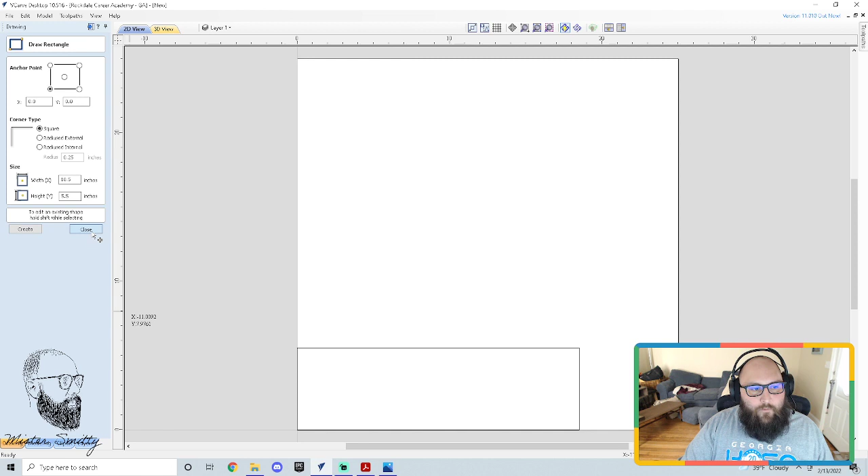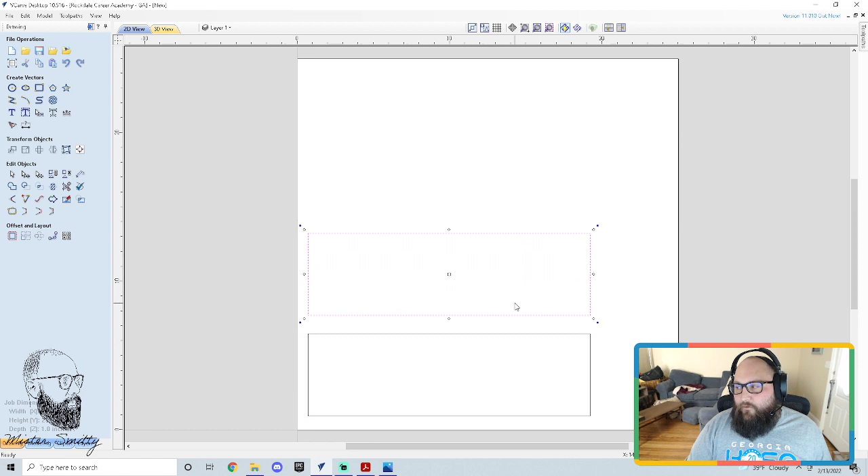So what I'm going to do now is I actually need 2 of these. One's going to be the board, and one's going to be a cover that goes on top. So I'm going to move this off the edge a little bit, using the arrow keys. Remember, if you click and highlight and it turns that pinkish purple color, you can use your arrow keys to move. Then I'm going to Control C and Control V to create a second one, and I'm using the arrows to move that one. So these are kind of my tops and bottoms.

One thing I have not shown y'all yet is you can use a measuring tool. Over here on the left, under Edit Objects, there is a measure tool. So if you forget your dimensions, you can use this tool to measure it. So you'll see that I measured that top piece, and up here the distance is 18.5 between those 2 points.

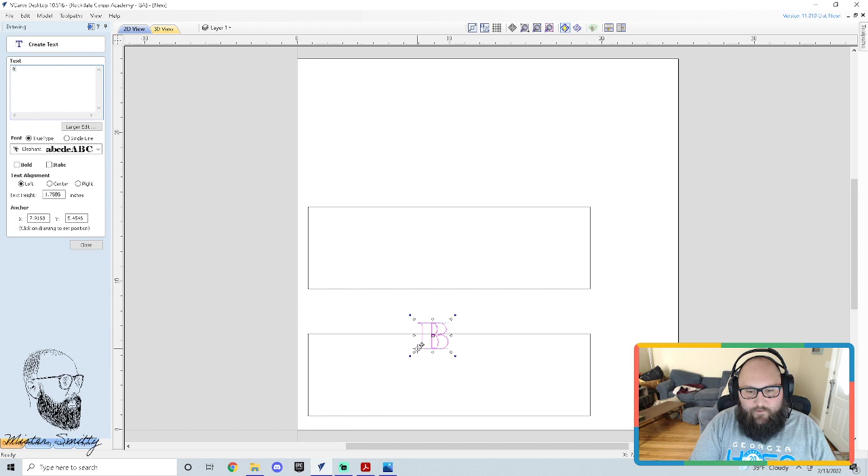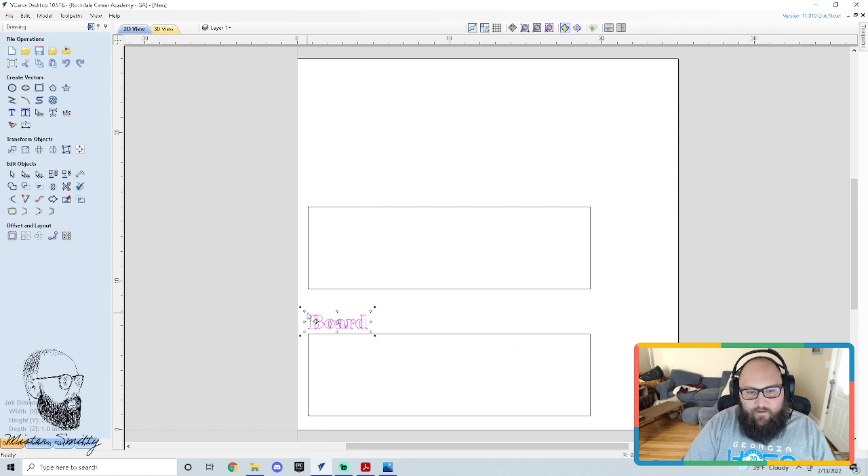One thing I do like to do sometimes is I like to label my pieces, so with text boxes. This is the board. I'm just using a text box tool. Let me do that again. The board, with caps lock on. So I'll just kind of make it smaller, and I like to label my different pieces. At the end, we won't add a toolpath - it's just a little label to help us keep track of what we're doing.

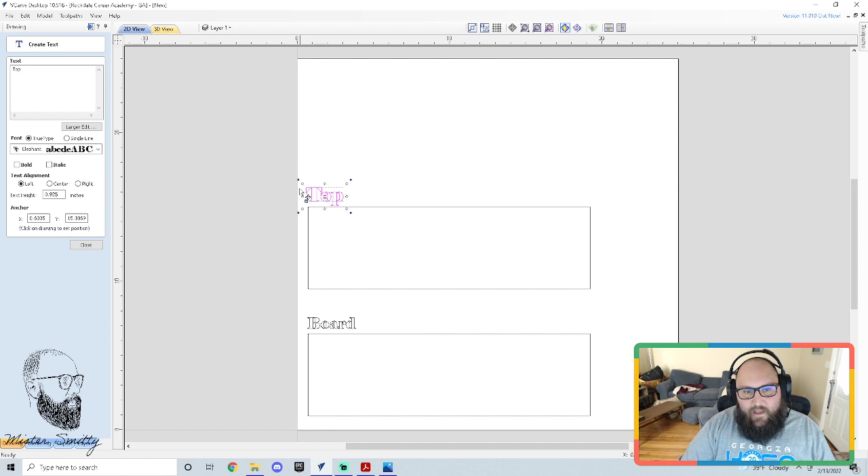Also, this is the top piece. So I do encourage you to label your pieces, especially as we start getting into more design. If you're building like a dresser or something like that, you're definitely going to want to label side A, side B, side C, left side, right side, top. So we've got our top and we've got our board.

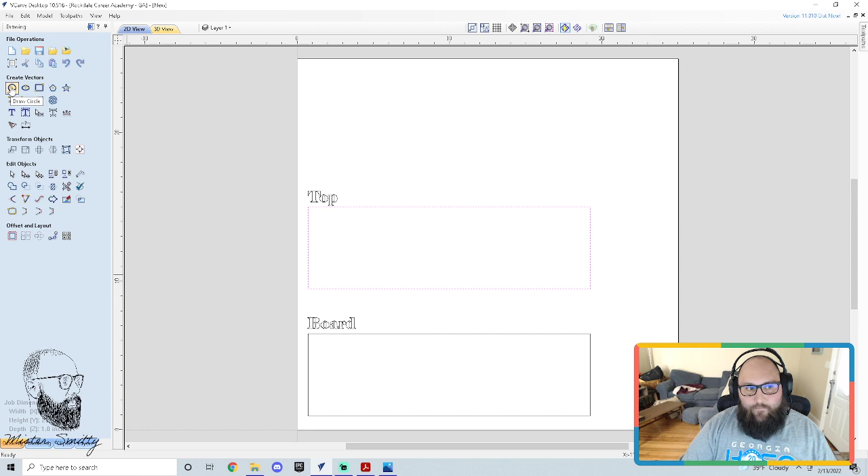Alright, so first thing we need to do is we see that our first position is 1 3/8 inward and 1 3/8 up. So we need to figure out how to place our first point. It's easy to draw a circle, guys. It's real easy. For this, we're going to use 2-inch diameter circles. So I need the radius to be 1 inch. So I'm going to click create.

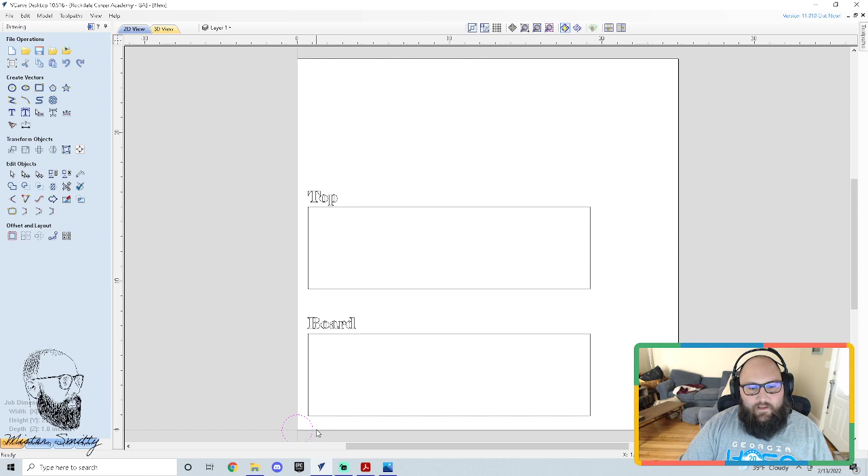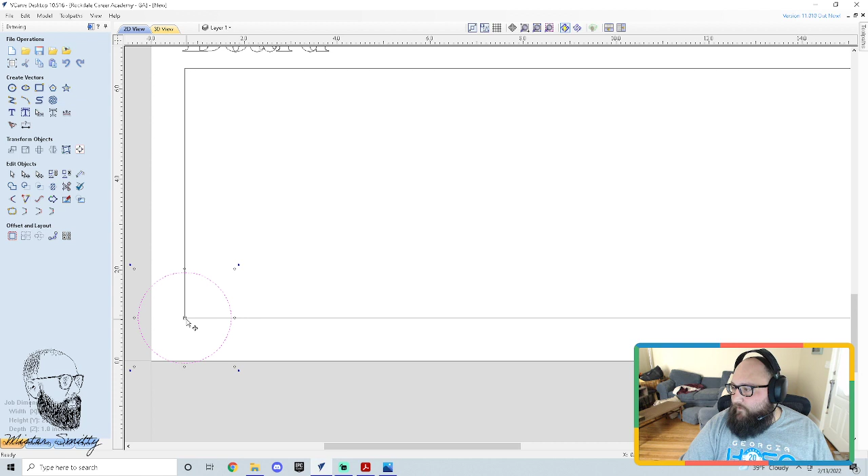It's real easy for us to just kind of drag a circle onto this board. Super easy. But it's kind of difficult for us to place it in the correct spot. There's several ways you can do this. One way is to place that circle perfectly on the bottom left. And then you can go into your circle tool and see that that position is 0.712 on mine and 0.9493 in the Y. And I can just do a little math.

Or we have a dimension tool here. The dimension tool can help us place stuff. So let me show you where that was again. Next to the bitmap trace tool over here, there's the dimension tool. So I can go in here and actually dimension to find stuff.

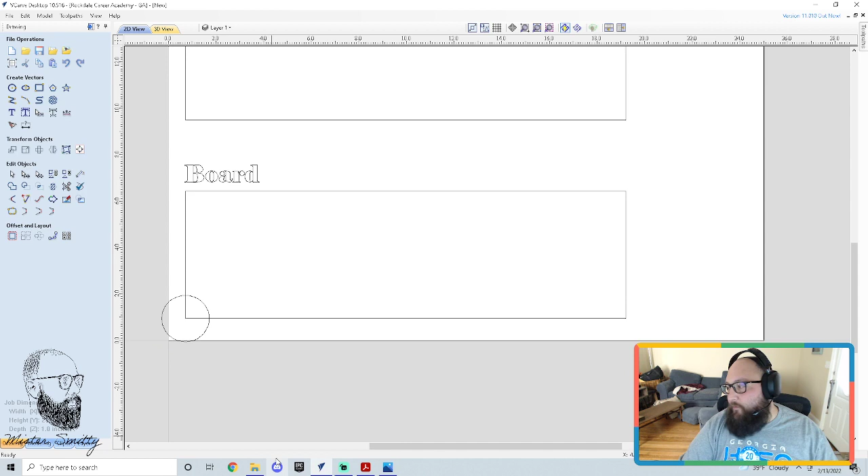Or sometimes what I like to do is I like to use rectangles. So for this scenario, I'm going to show you how I'm using rectangles to figure out where we're going. Oh, hold on. Let me change the size first. So if we look back at our plan, we know that this is 1 3/8 in, and the height of our board, if you remember, is 5.5. So 1 3/8 in and 5.5 up. We could draw a rectangle there. So let me get back to this.

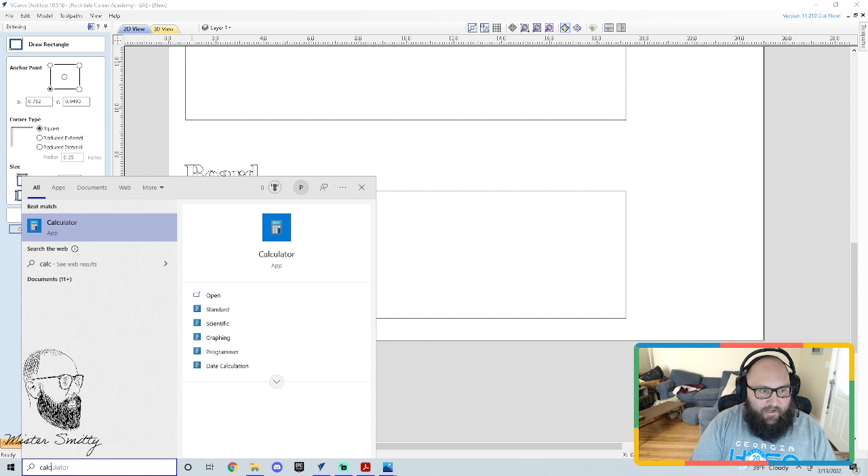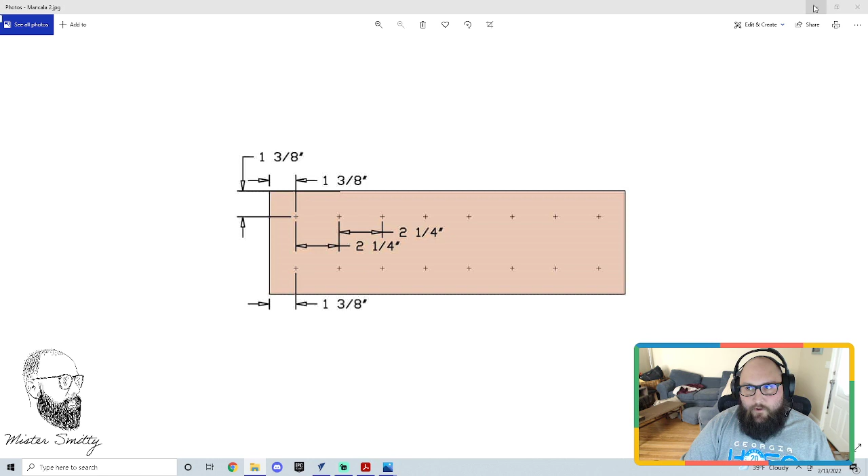So I'm going to go a rectangle, and I need to go 1 3/8. So on my calculator, 3 divided by 8, if you just don't know it off head, is 0.375. So 1 3/8 is our width. So 1.375 by 5.5, and I click create. So that gives us this rectangle here. If we look back at our plan, our next rectangle is 2 1/4 over, 2.25 over. So I'm going to draw a series of rectangles to get all our points in here.

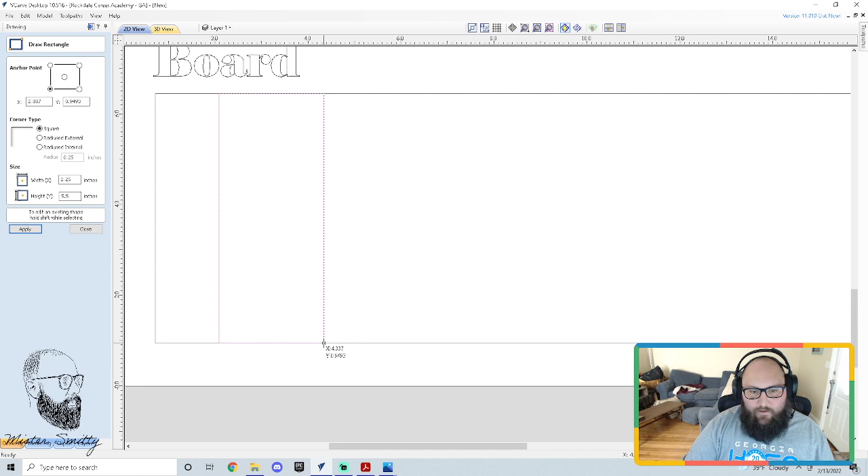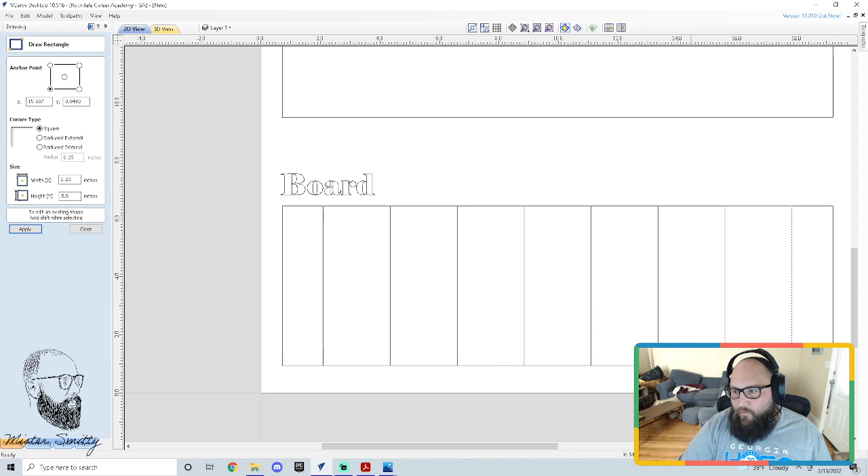So now I'm going to change the width from 1.375 to 2.25. And when I click on this bottom right corner here, let me zoom in. It drew my next one. And if I click here, it drew the next one. Sorry, guys. We're going to need these to go all the way across. So I'm going to click that one, that one, that one. Looks like one more. And if it worked correctly, my dimensions will be pretty accurate.

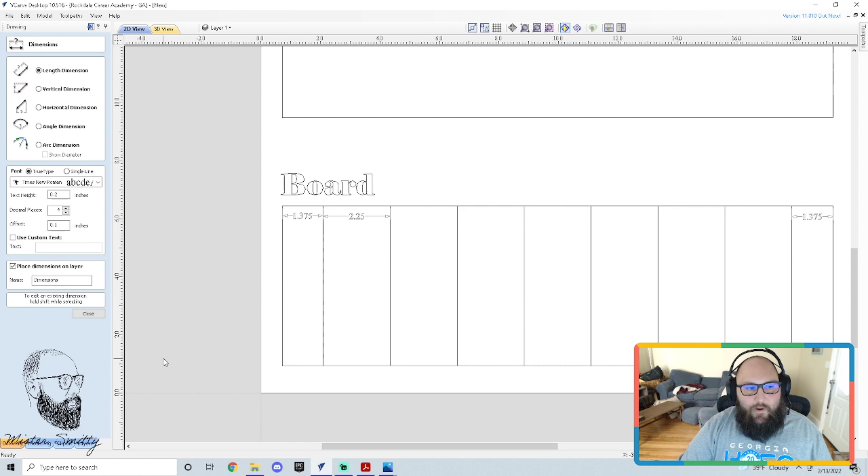So that dimension tool up here by the little bitmap trace bird, if I click here to here, 1.375 is what I wanted, here to here, 2.25. That means that over here should also be 1.375 if everything is working, and it is. So I'm just using rectangles to help me space out my board. This is just one way. There's multiple ways you could do this. I like to use rectangles and circles to help me get my points.

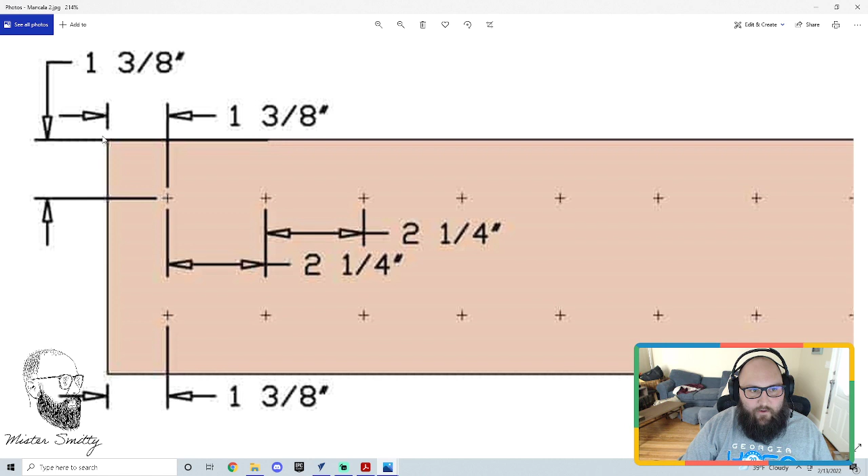So let's look at our board again. What's our next move here? Well, our next move is we now need to create the crosspoints. So we need a rectangle, well, really a square that goes 1 3/8 in and 1 3/8 down. So I'm going to go to my rectangle tool now, and 1 3/8 is 1.375. So on my width, 1.375. Create.

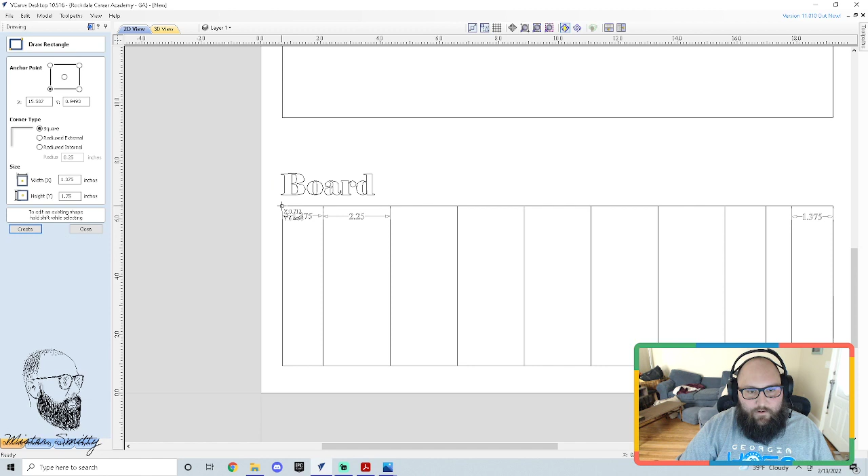Oh, actually, we need to change our height, right? 1.375. Because look, we're trying to get this little rectangle here so we know where that middle point is. So I'm going to click this corner.

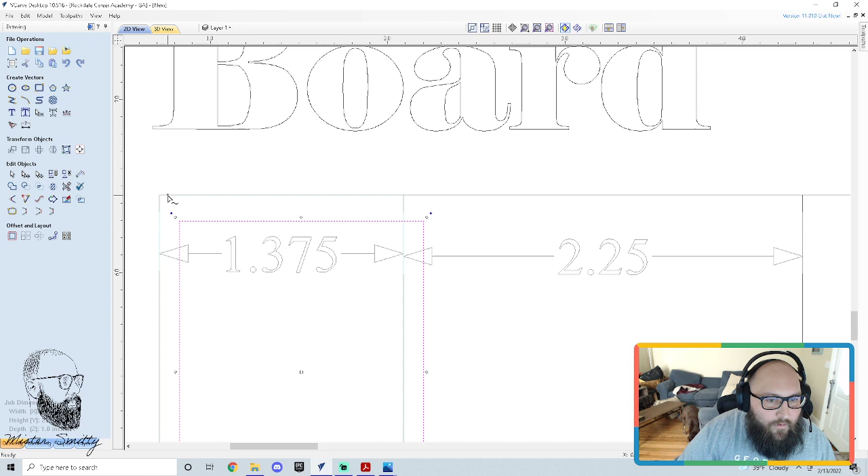And I can actually Control C and Control V and move a copy up to the top. So just make sure you want to drag it so it lines up. Oh, let me grab the corner. There we go. You just want to drag it so that everything lines up. So you're just putting these in here so we can find this center point here.

All right, so now really, if we can just draw a line across or extend our rectangle across. Oh, that moves it. I want to drag it. So if we drag this across and we drag this rectangle across, then we kind of have all our markings for our board. Uh-oh, I had an extra one in here. My bad, guys.

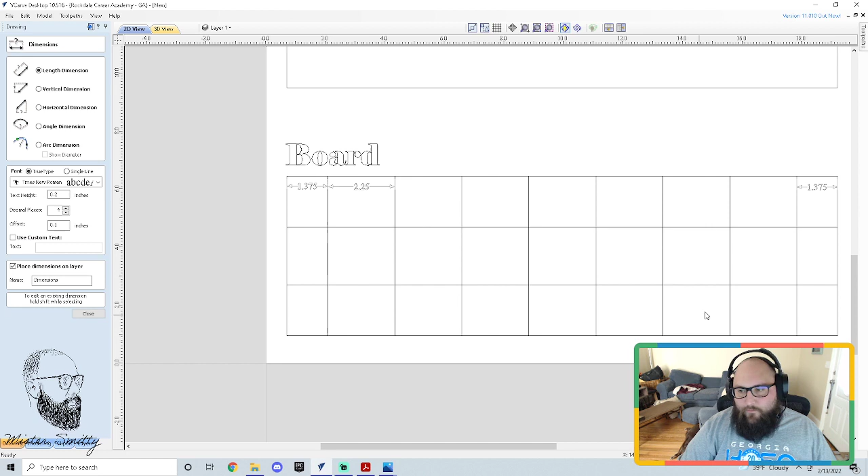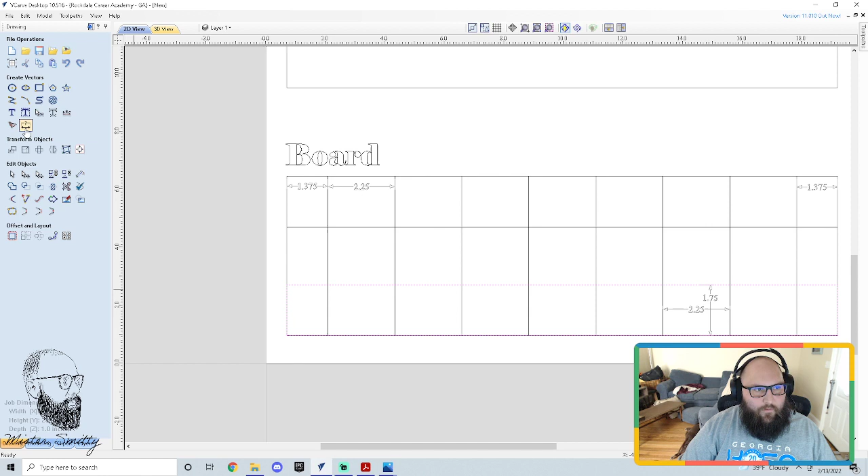All right, 1.375. So I can just double check. If I take my dimension tool, from here to here, should be 2.25. From here to here should be that 1.375. Huh. What is it from here to here? So this is why it's always good to double check your dimensions.

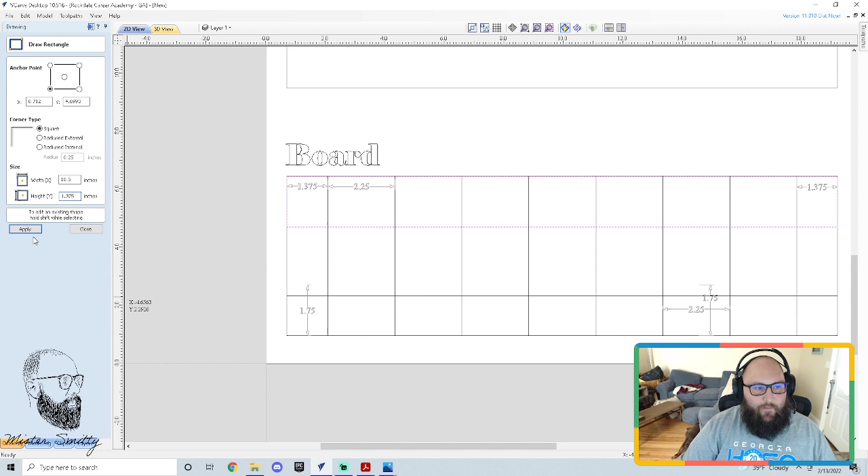So somehow this rectangle got a little bit too tall. I must have not pressed the 3 and I typed 1.75. All right, so I'm going to highlight that again. Yeah, see, I missed the 3 there. So 1.375 and click apply and it'll shrink it, which means I also need to switch this one, 1.375 and click apply. All right, so guys, just make sure all your dimensions make sense. So I just showed you that I double checked mine and they didn't work out how I wanted.

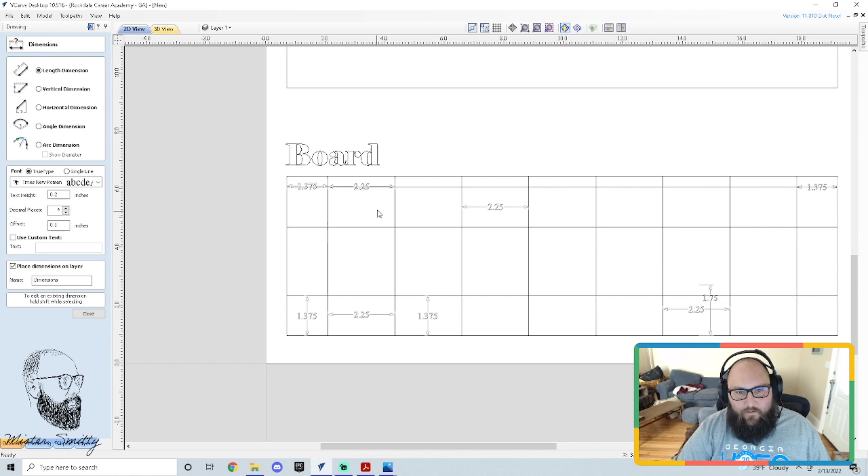So this is 1.375, right? So now we're looking good. This should be 2.25. I'm just kind of randomly checking. Okay, yeah, that's even all the way across, so all that should be good. Just make sure you're drawing straight lines when you're doing this, and the dimensions should be good. Okay. The only weird one is, what is this one here? Look, I messed up on the top again. Oh, it's because it's not touching. Alright.

Can y'all tell that it's the morning?

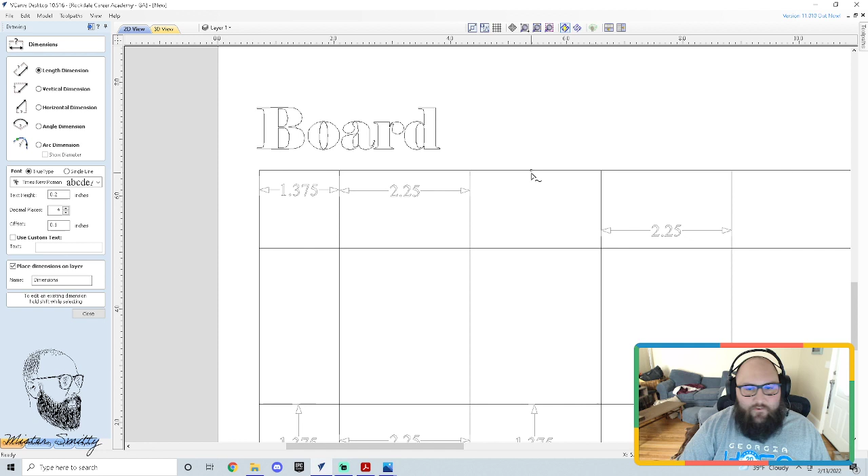Alright, there we go. So now I'm going to double check here the height of this little box, and 1.375. Alright, you just want to make sure that everything is spaced correctly. Alright, and mine is now. It took me a little bit of work, but now it is spaced correctly. Which means this should be here. Right? Let me double check my edges. Alright, looks pretty good.

So I'm going to go ahead and take a screenshot real quick. Alright, so that way I kind of have that for y'all later. I'm going to put it on It's Learning for y'all to refer to. Alright, so let's move forward.

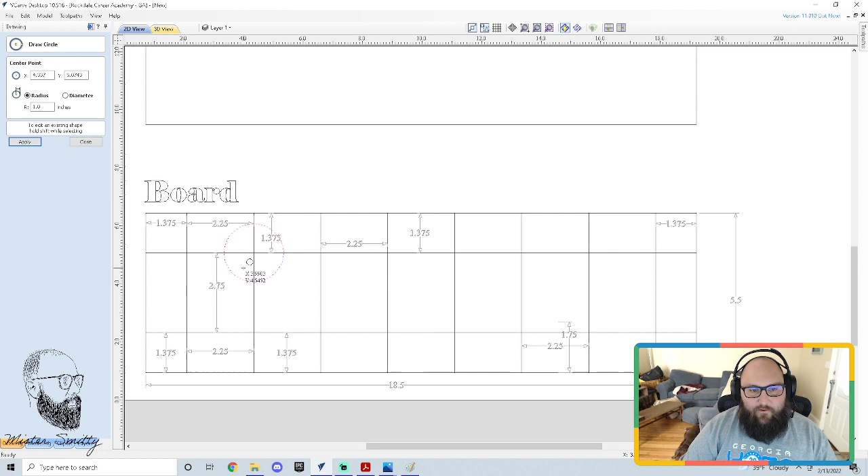So at this point we need to put our circles. Alright, and I told y'all that I'm going to do all the inside circles first, but I wanted to do them of diameter 2 inches. Let's see what that looks like. So I'm going to place a 2-inch circle on every one of these.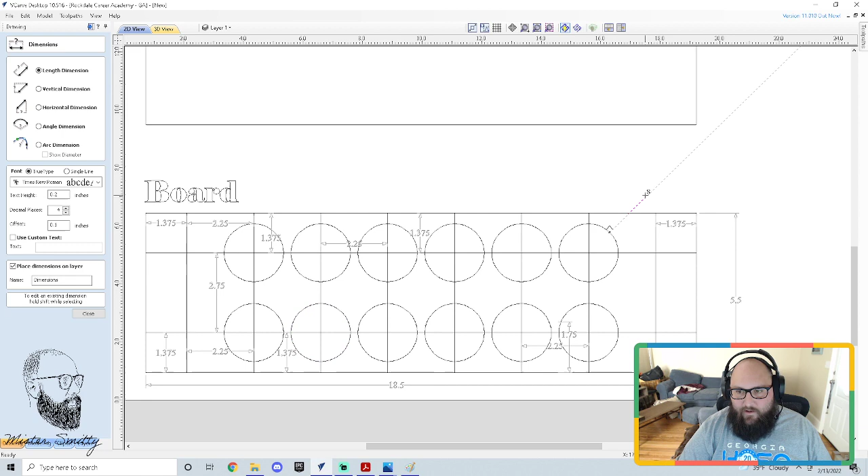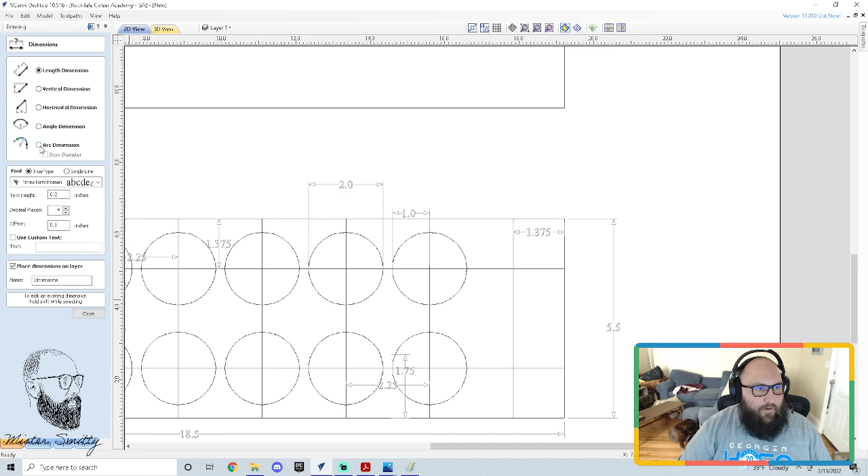Alright, and just to show you, I'm going to dimension that. And you'll see that, well, come on now. Let me just draw it across so that way y'all can see it. Or I can draw it there. See, 1.0. Alright, or if you're looking at the diameter, 2.0. Alright, so that's the dimensions for our thing.

Alright, I'm going to go ahead and move my webcam because we're starting to get kind of further along in this. So, we now need to draw our endpoints here. So the way that you draw your endpoints is you go back and you're going to draw a circle at each one of these points, like so. Alright, so I went back and drew circles. But then we have to actually connect them.

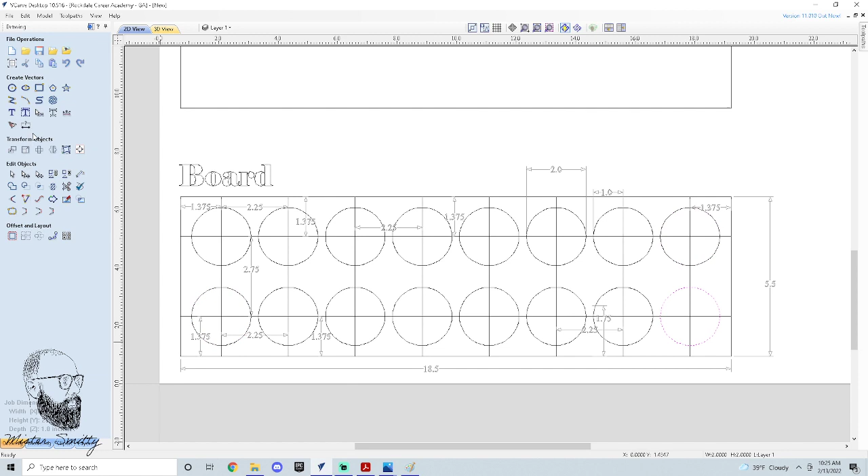Alright, so on the left side under Create Vectors, I'm going to go to the Draw the Line tool. And I'm going to draw a line to connect. Just drawing a line to connect the top circle to the bottom circle. And once that's done, then, sorry guys.

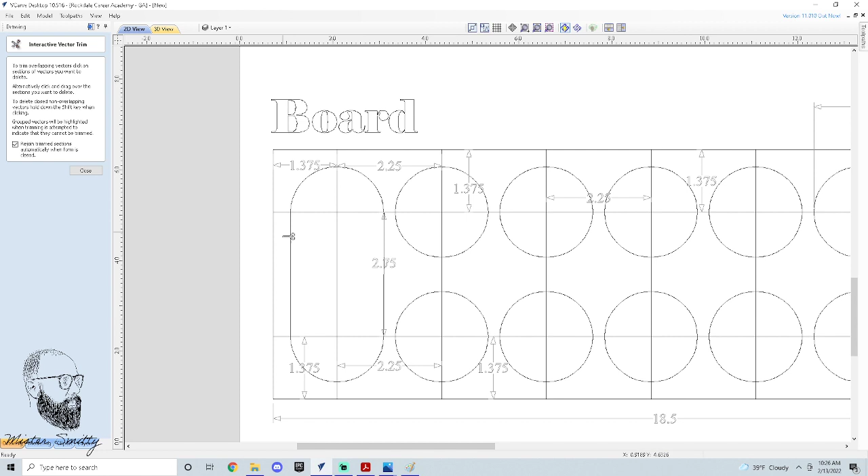Okay, once that's done, we're going to use what's called the trimming tool. So these little scissors over here on the left is our trimming tool. So if we click on those, we can click the inside of our circles. So that way it has this nice rounded, what we call the bank shape. And I'm going to do the same thing on the right side.

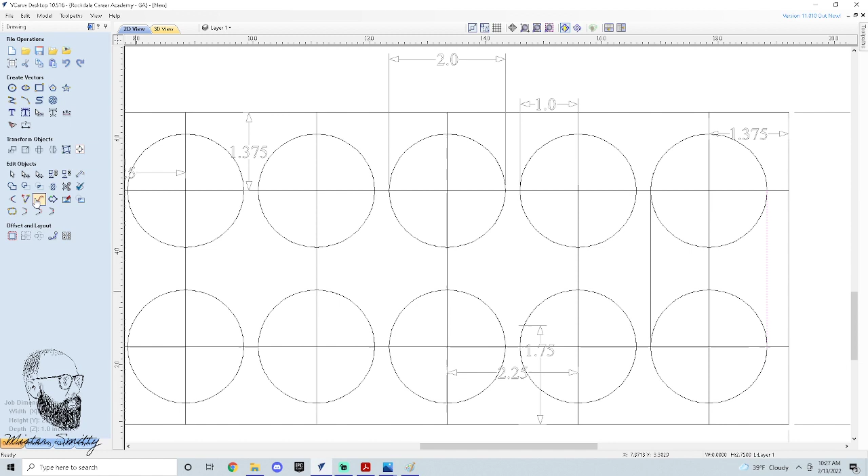So if you missed it, I'm going to do it again. So I'm going to connect the edges of our circles. So like right where, if you're going from the origin of the circle out to the diameter, you know, right to the edges, just kind of connect them like so. And then I am going to trim. Oh, I trimmed the wrong lines. Trim the inside circles.

All right, whenever you do trimming, it's always a good habit to go back and click on what you just made and make sure it's one piece. All right, so you see how mine is one entire piece, and that is one entire piece. So I know that when I trimmed, I actually trimmed accurately. All right, I didn't mess up in my trimming.

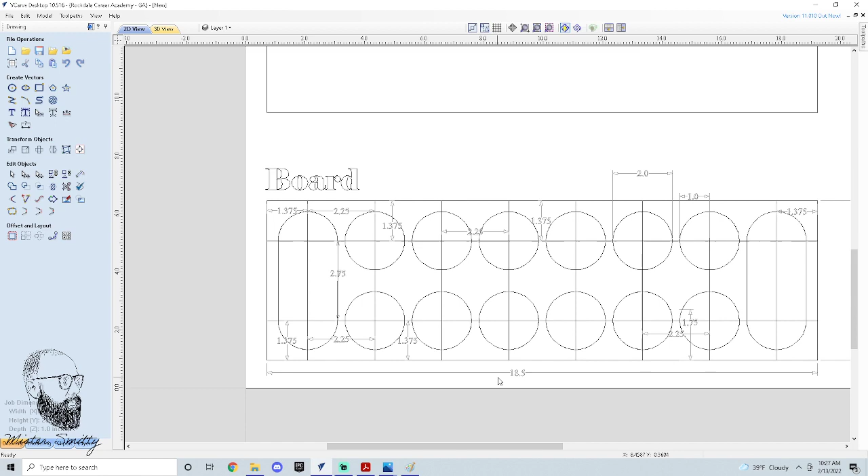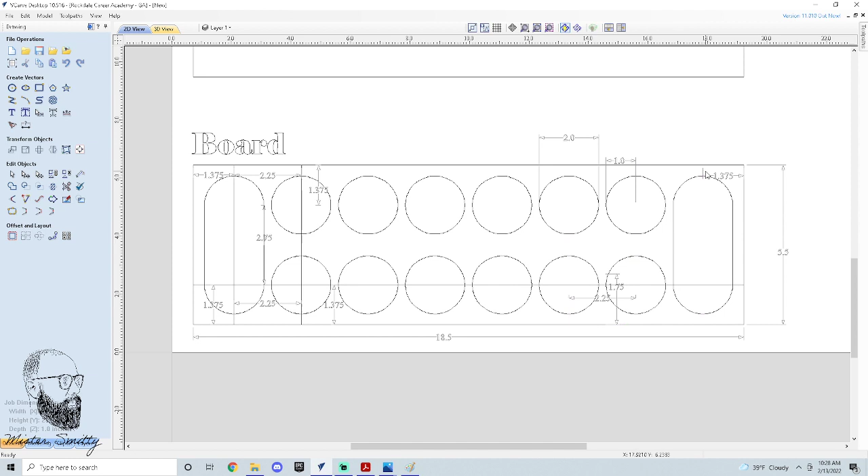So at this point, guys, our board is pretty well made. It's looking pretty good. Remember, all these little rectangles we drew are there for us to double check ourselves. So we don't need them anymore. So all the rectangles and dimensions that we did along the way, we can now go in and delete those because they are not part of our actual design. They were just there for us to make sure that everything is kosher.

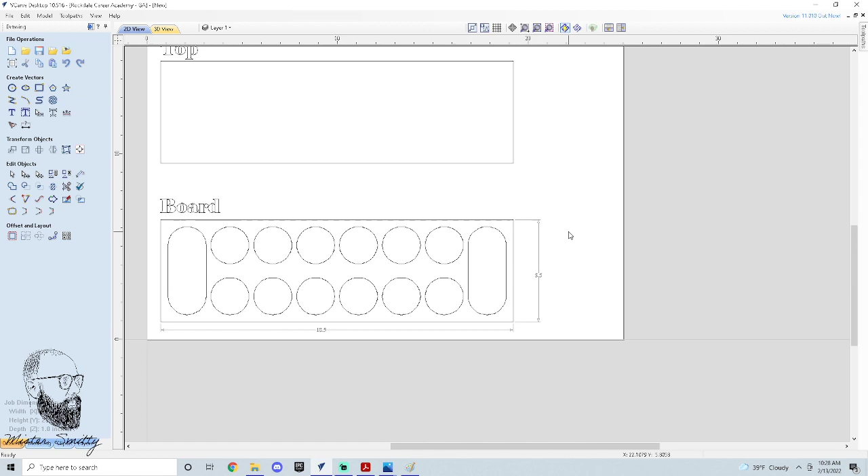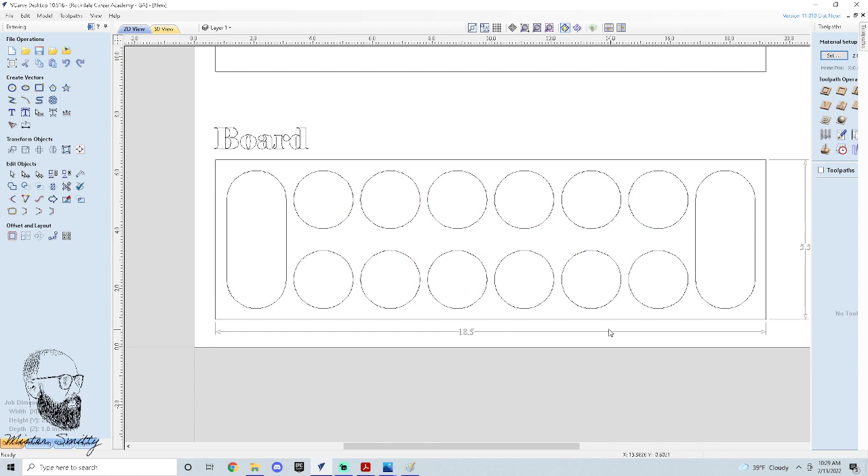All right, so I'm going to leave the outside dimensions, but yeah, this is what our board is going to potentially look like. All right, so what I want to do now is I'm going to drag click all the circles we made for the inside of the Mancala board. And I'm going to right click and I'm going to group those. The reason why is we're about to do the toolpath. And to do the toolpath, if we mess up, it's easier to click and they're all highlighted.

So on the right, go ahead and go into your toolpath. I like to click the little pin on the top right, because it keeps my toolpath open and I don't have to keep clicking it. All right, so what we're going to do first is we're going to do the toolpath for a pocket, because we don't want these cut all the way through. We want them to be pockets. So I'm going to click that.

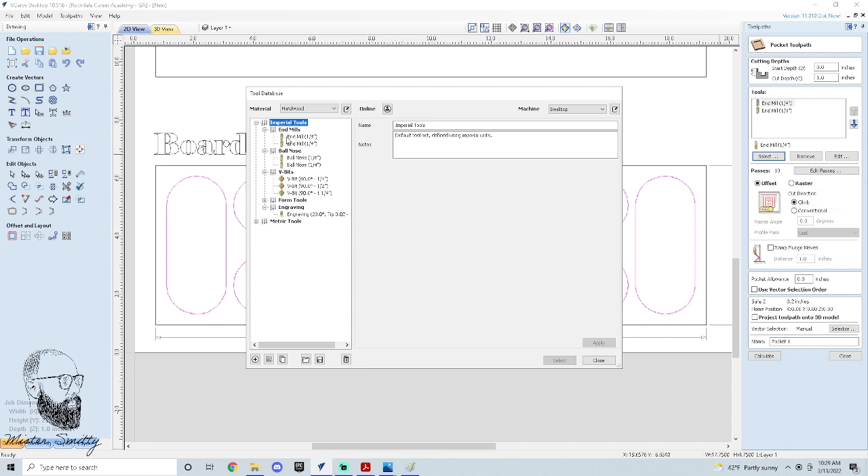I want to use my end mill 1/4 inch. Again, if you don't see that, guys, go into select, go into Imperial, open up end mills. Sometimes it's closed up like this, so you need to open up end mills, make sure you grab that 1/4 inch and click select. All right, so I'm going to use my end mill 1/4 inch. My cut depth, our board is 1 inch thick if y'all remember from the beginning. So our cut depth, let's do 0.4, almost halfway through.

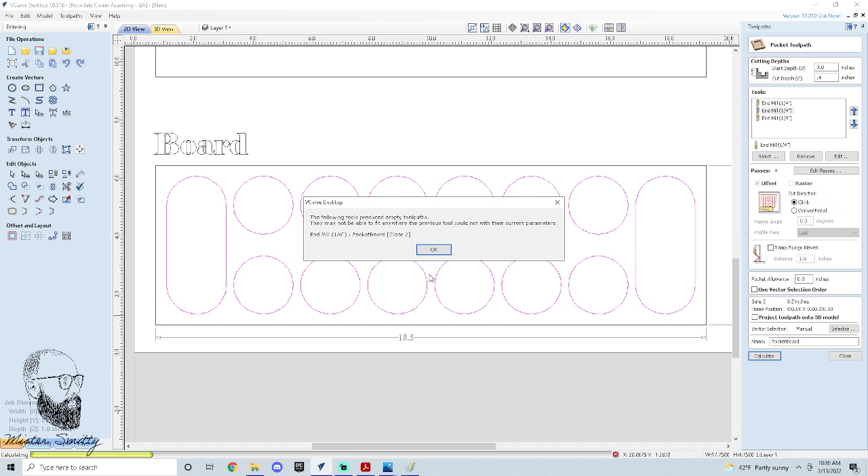And then this is going to be, let's call it pocket board. I like pocket board. All right, and then click calculate. All right, so mine says that I have one open vector, so I'm going to click OK. All right, so I did have an error there. I'm going to reset preview and preview all. Okay, so because I see that my left side here did not show up, that means that I have an error. So I need to go in and fix that.

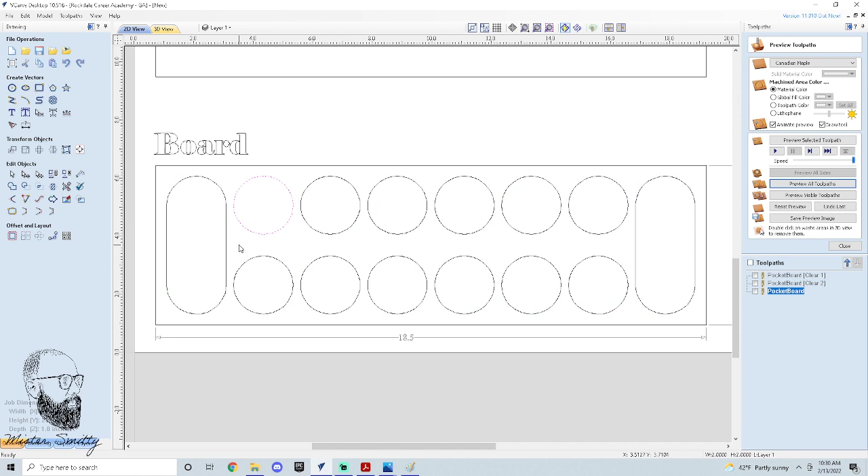All right, I didn't mean for this to happen, but I'm glad it did, in case you get an error, you might run into the same thing. So I want to right click, ungroup back to the original object layers. And that just means I need to come in here and fix this. I instantly see, do y'all see that? That two of my lines are not connected together. I didn't do this on purpose. It just kind of happened. But this is a good chance for me to show you the join tool.

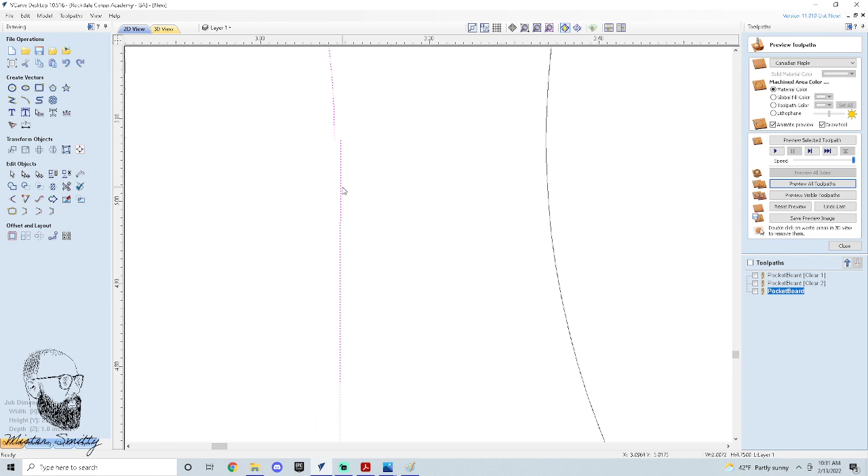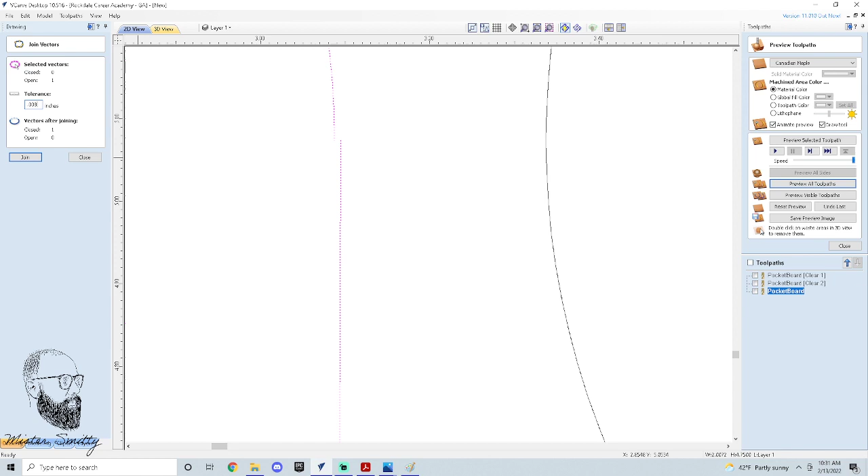So over here on the left under Edit Objects, not the weld, the join tool, I can click Join. All right, so my tolerance here is only 0.005. That means that this gap is further than 0.005, so I have to change this. So like 0.05. It still doesn't find it. 6, 7, 8. All right. If I hit join, now it will pull those two lines together. And I now have actual vectors that are complete. So if that ever happens, guys, use the join tool to join your things back together.

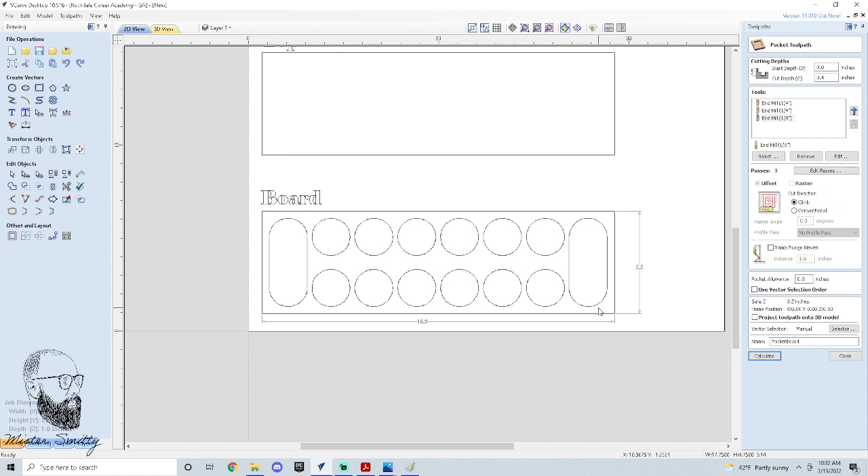So I'm going to double click my pocket again. I'm going to highlight what I want and I'm going to click calculate. Let me look at this. Actually, I'm going to delete those and run the pocket from the beginning.

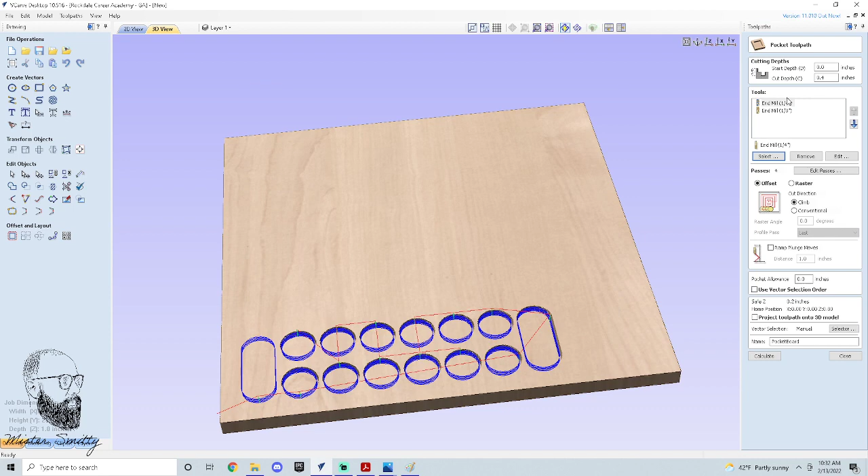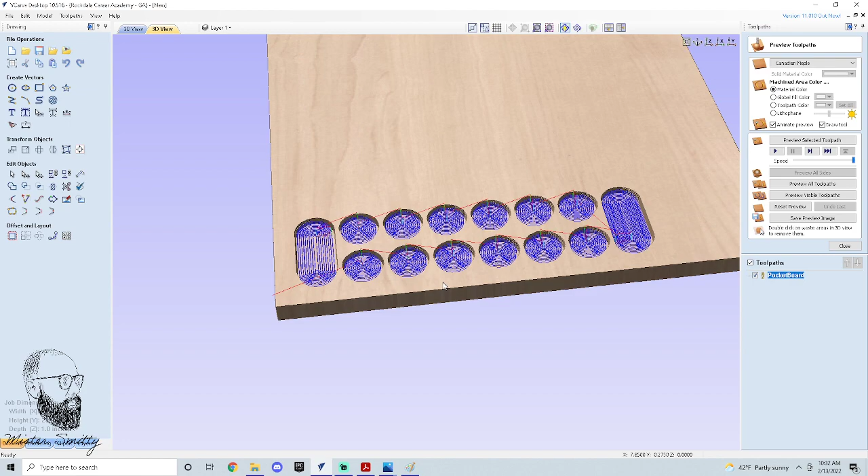I'm just resetting it up. Okay, there we go. So I had multiple bits selected, so I had multiple bits inside my tools. So we're only using one. Double check that you only have a 1/4 inch end mill here, so that way it'll just use one tool and not have you actually clear it twice.

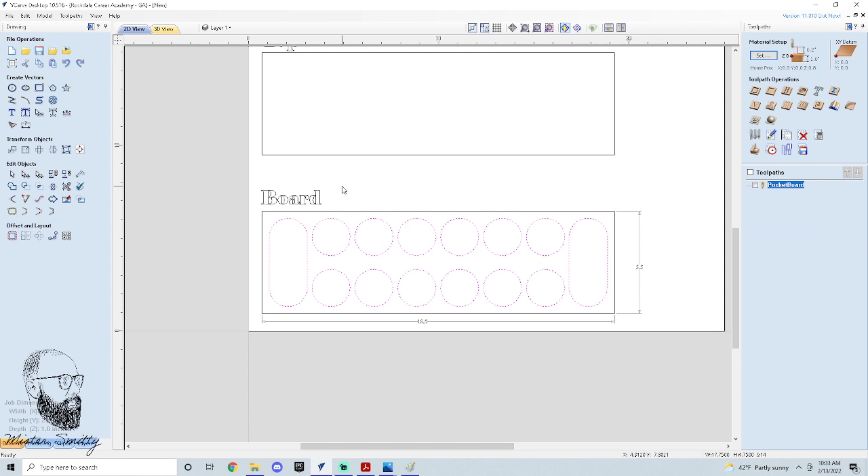Alright, so if I just keep reset preview all, you can see my nice little Mancala boards coming along, right? Our next move, if we close that and go back into our 2D view, now we need to cut out our outsides. So I'm going to cut that and that. All right, when we cut things out, we use what's called the profile, which is the first one. Remember, our board depth is 1 inch, so we need to cut 1.05. You always want to go a little bit more.

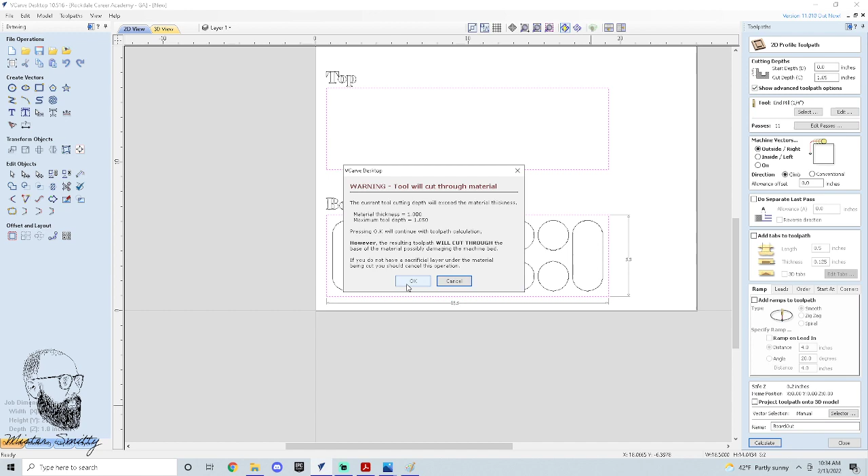All right, so start depth 0, cut depth 1.05, end mill's 1/4 inch. All right, we want to cut along the outside. I don't think we need to add tabs for this one. I think it'll be okay. And then I'm just going to call this board out. All right, so then I'm going to calculate, and you will see here that it cuts our 2 pieces.

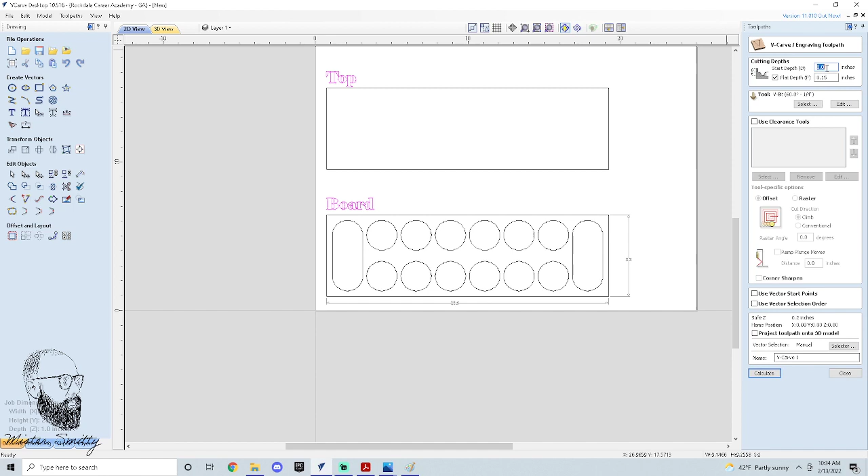All right, if you want, guys, just for practice, if you want to go in here and highlight your text, you could do a VCarve on that text. 0.15. I'm just going to call this text. Again, I'm just using those to keep track, but if you want to have it on your final board, you can. All right, so for the top piece here, guys, basically this is going to be a lid. This is going to be a lid for it.

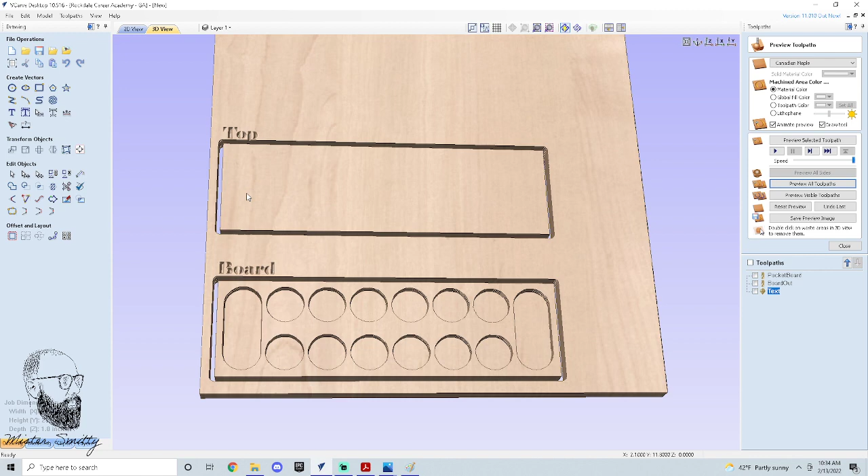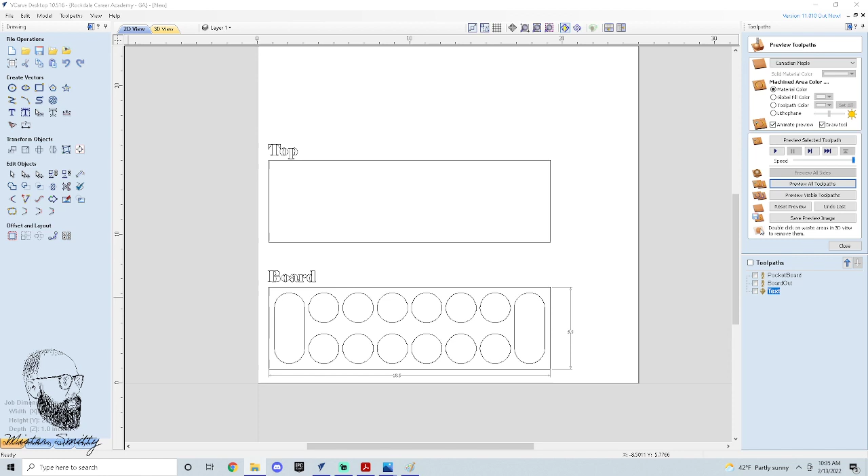So what I want you to do is, we've been working with images, so this is going to be good practice for you. I want you to design your own kind of logo on the top. All right, I don't expect you to follow what I'm doing. I want you to design your own design for the top of this. The only requirement is I want you to have the word Mancala. All right, so somewhere on the top, you need to have Mancala and at least one image. So for mine, this is doing a little branding for myself, right? So maybe I might pull my

Hello. Hey guys, sorry, my headphones died.

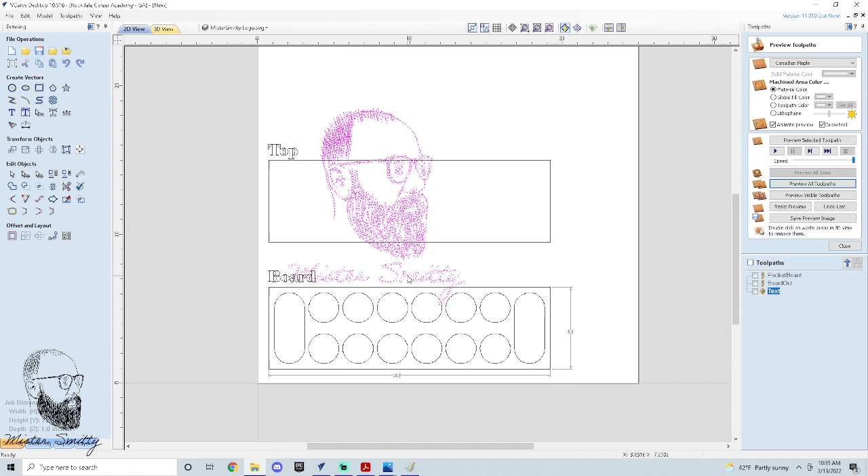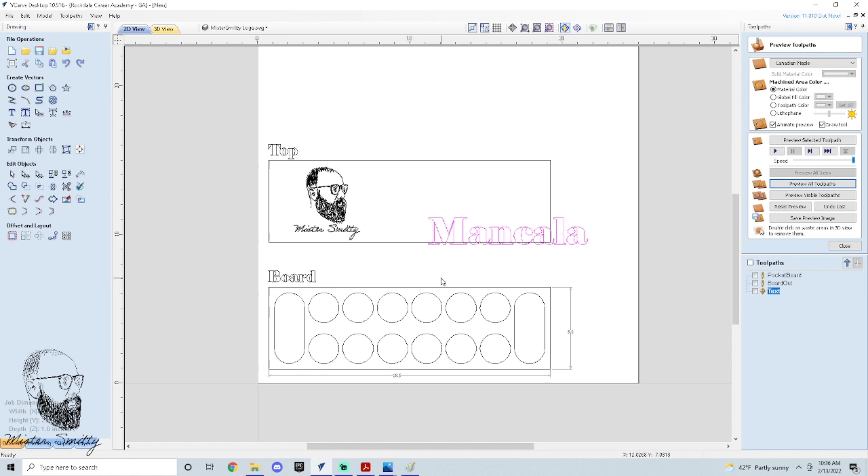Yeah, maybe I'll pull my own logo into this and shrink it down, have it in the middle there, and maybe on mine I'll go in here, add a little bit of Mancala. Alright, so the only requirement is you have the word Mancala and you use at least one image, but take the time to be creative. Really put some effort into this.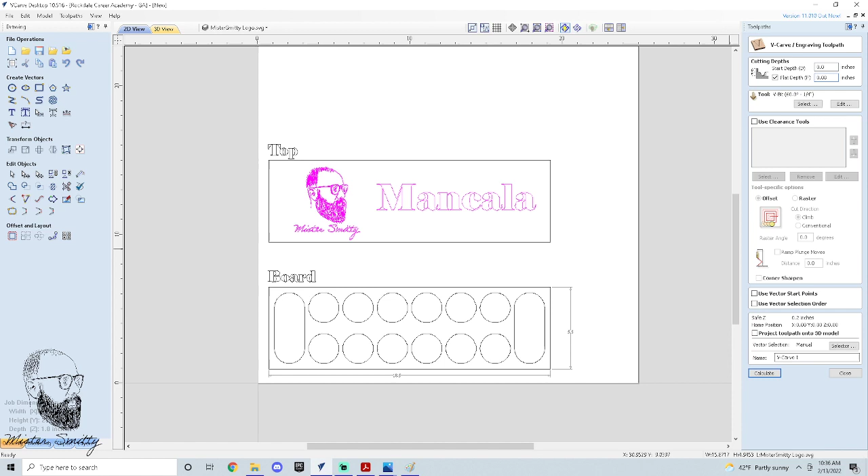So now I'm going to group that together, and I'm going to see what a carving looks like. So I don't want to go as deep on that, so maybe 0.08, and I'm going to call this top text maybe. Alright, so it looks like I got a bunch of vectors that are probably not, yeah, look at this. That's the only issue with having your own design, is sometimes your vectors just don't work out very well. So I'm going to ungroup this just like I did earlier. Actually, I think part of the issue is I need to do what's called a weld, which will combine a lot of those things. Unfortunately, it combined my beard.

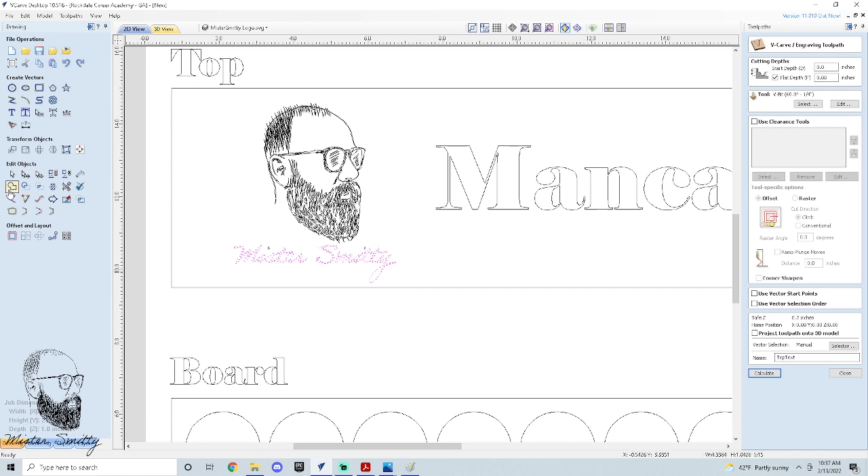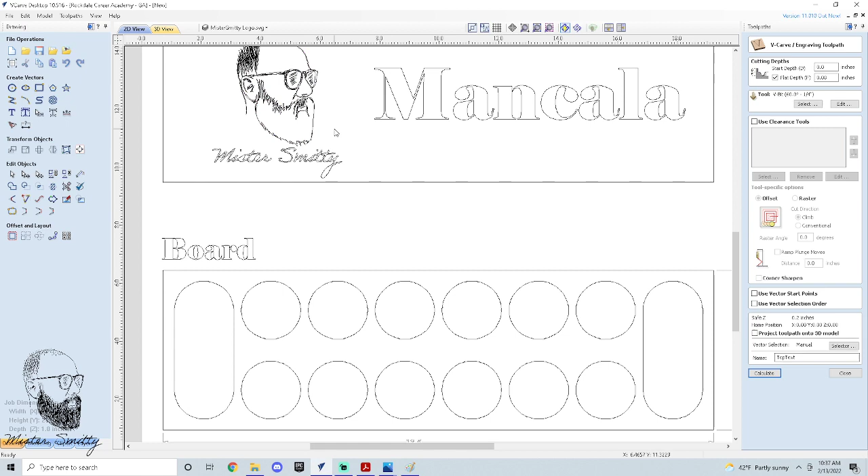Let's see, I'm going to weld my name together. So what the weld does, let me just show y'all real quick. You see how these letters are overlapping each other? If I highlight all of that and I use the weld tool, then it actually welds them together. The overlaps go away. So that is definitely what's happening here with my beard. The issue is when I want to weld the beard. Actually, that don't even look that bad. Let me just try to join.

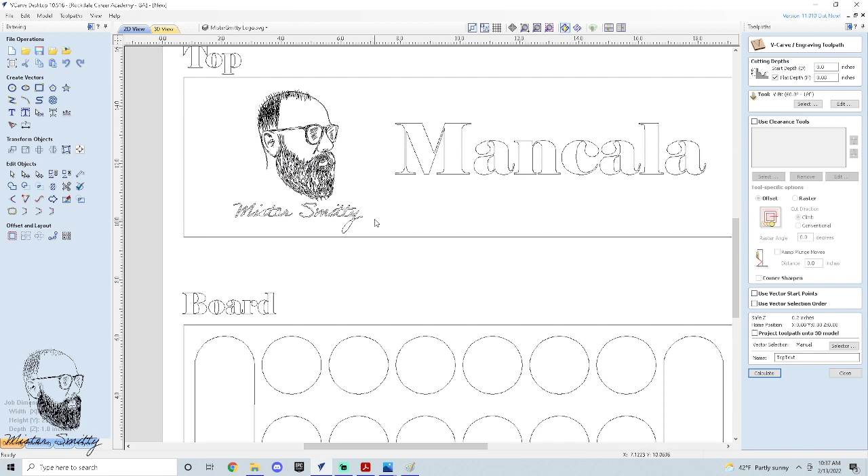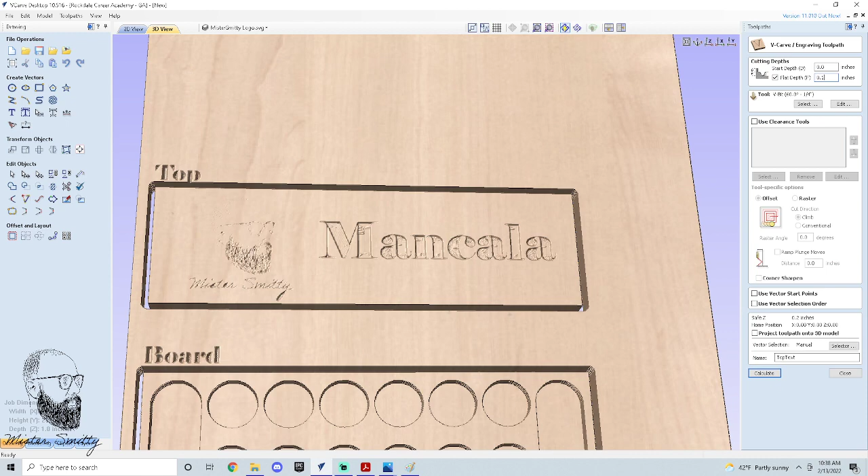Yeah, there's so many. Well, maybe there's not a lot of open vectors anymore. Alright, so let me see. I'm going to group these, calculate. I'm just going to continue anyway to see what it looks like. Okay, it don't look bad. Even though I have some open vectors, it doesn't carve very well though. So I need to work on maybe the depth here. Maybe go a little bit deeper. See what it looks like if it's a little deeper. It's coming out a little better.

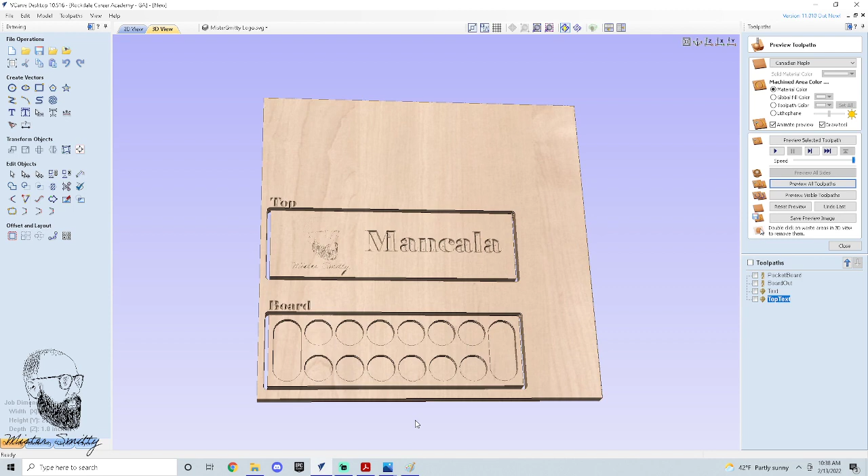So I need to work on my logo, guys. That's really not the point of this video. I've kind of wasted a few more minutes of your day. But this is what I want you to work on this week. We're designing your own Mancala board. I have some marbles, so when you're done, we can cut these and have ourselves a little classroom set of Mancala. So as always, when you're done, please screenshot your 3D and your 2D view. I look forward to seeing your unique designs on your top. Everybody's bottom should be pretty much the same.